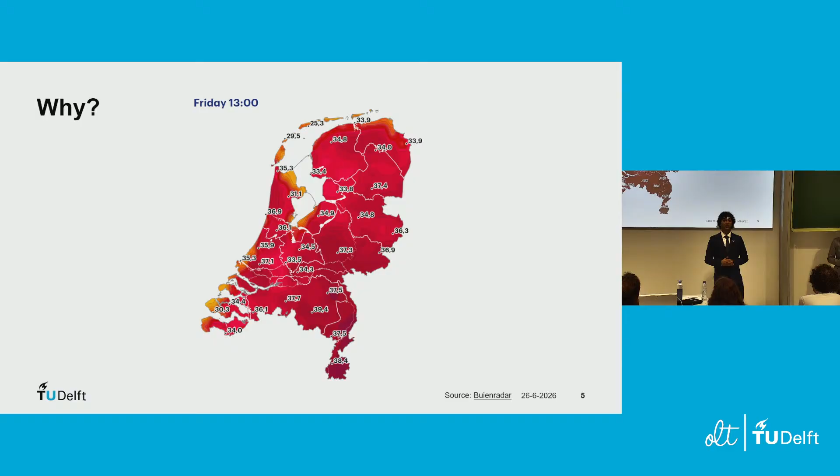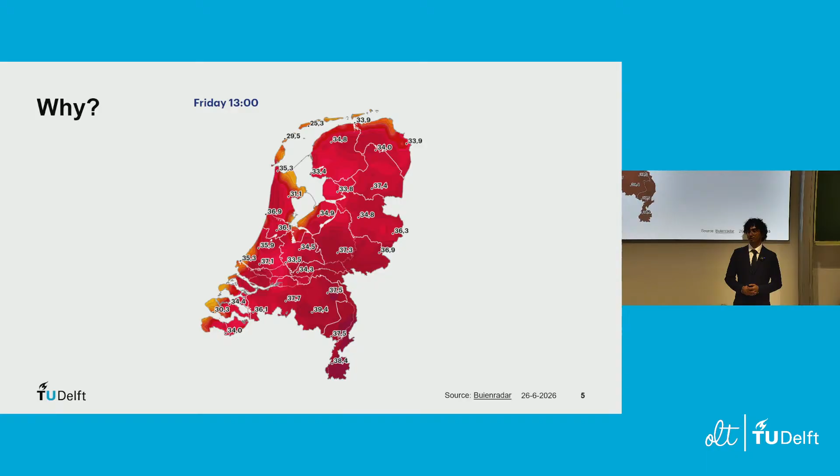It is a result of continued negligence of humanity to treat climate change with the respect and urgency that it deserves. Something has to change, and commercial aviation is one of the biggest contributors to this problem. Per passenger kilometer, commercial flights create more CO2 than any other modern mode of transport, and 20% greater than the next most polluting method. In 2025 and 2026, this has been okay.

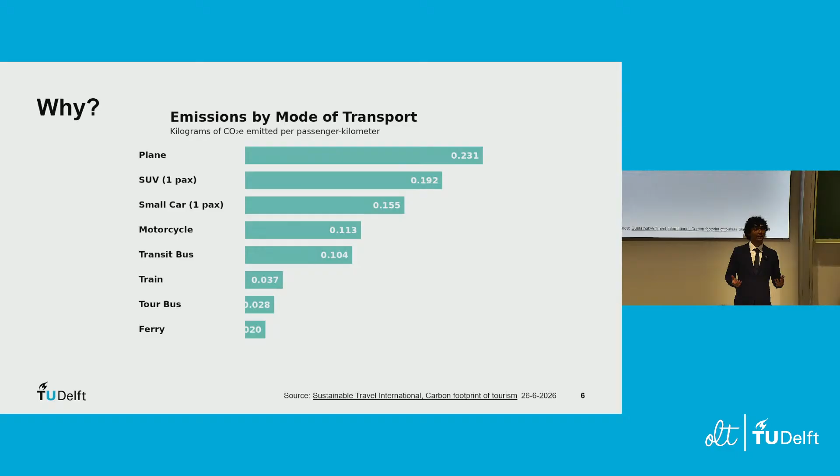However, leading up to 2050, if nothing is done to prevent it, this could become a much larger problem. Why, you may ask? Well, that is because by 2050, worldwide aviation is expected to double. More passengers, more flights, and more emissions.

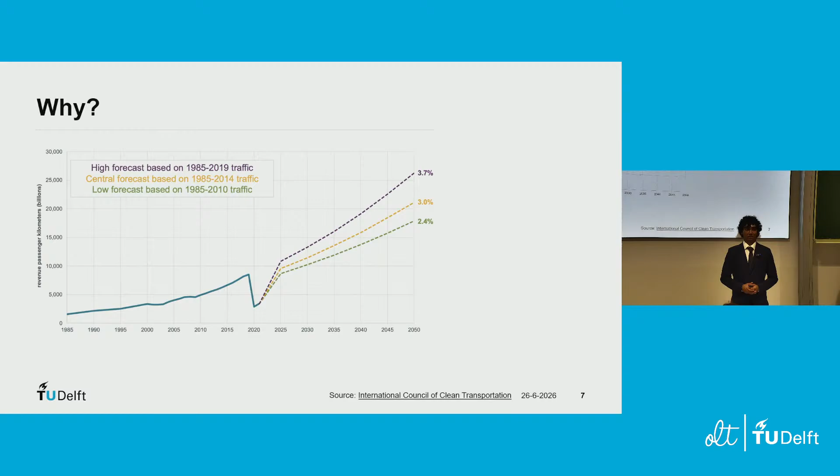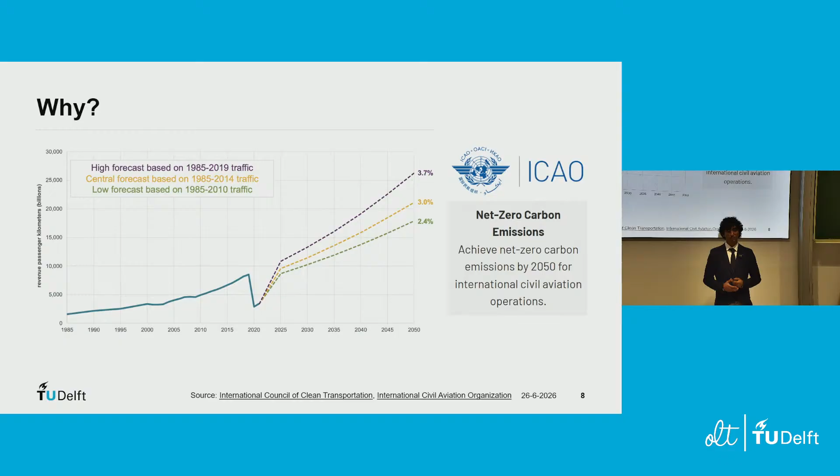In addition to this, the ICAO, International Civil Aviation Organization, plans to reduce emissions of aviation operations to net zero by 2050. The titans of the industry, Boeing and Airbus, have done little to prevent this, and as sustainability and emissions requirements become more stringent, they will inevitably fall behind. And this is where we come in.

The Everwing has focused on the narrow-body market for commercial aircraft. There are two main reasons for this. The first is that the narrow-body market is by far the largest of all commercial aviation. From all of Airbus's wide-body programs throughout history, they have combined to a total of approximately 3,800 orders, while the A320 family alone has combined to a total of almost 20,000.

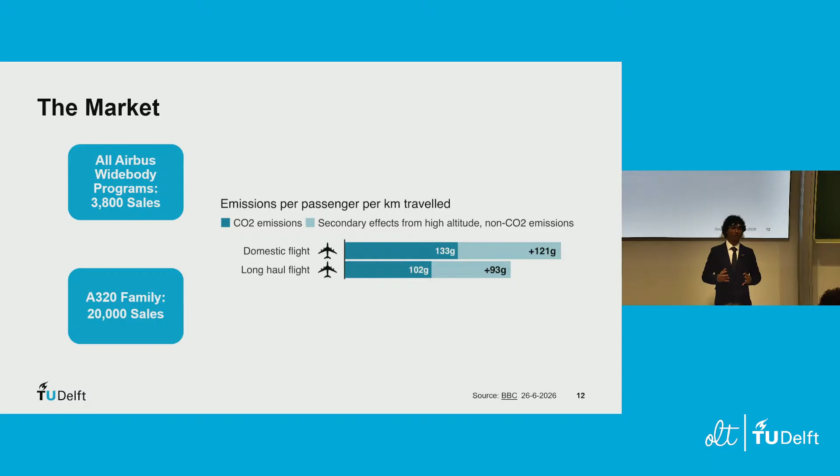The second major reason is that short-haul flights and domestic flights create substantially more emissions than long-haul flights do, and narrow-body airliners fly short.

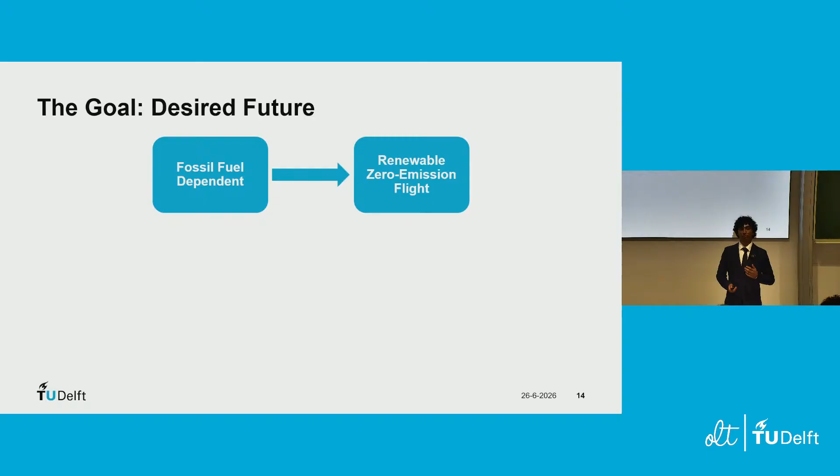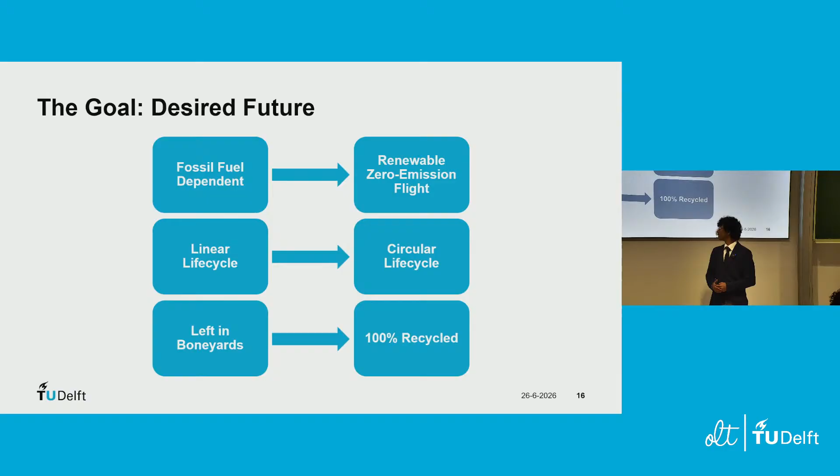In this market, we see a future in which we can go from a fossil fuel-dependent aviation industry to one in which flight is renewable, sustainable, and zero emissions. We see a future in which aircraft no longer follow a linear life cycle, but are rather used for the next generation. And we see a future in which aircraft go from being left in boneyards to being built 100% recyclable. In order to achieve this desired future, we have extrapolated three main goals driving the design of the Everwing.

The first is net zero in service emissions. The second is full end-of-life recyclability. And the third is minimized environmental impact over its lifetime. We have done this all while providing superior performance to the A320 and Boeing 737.

Let's look at some stats. This is the life cycle CO2 equivalent emissions of the A320neo projected to 2050. And this is the Everwing, almost 10 times lower.

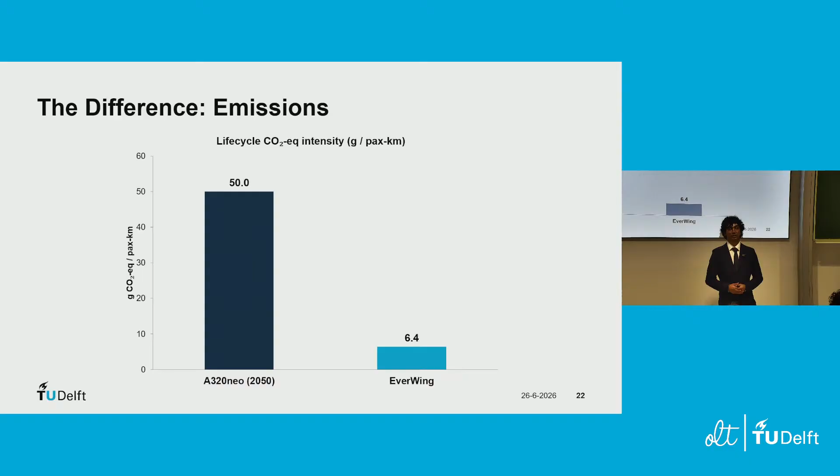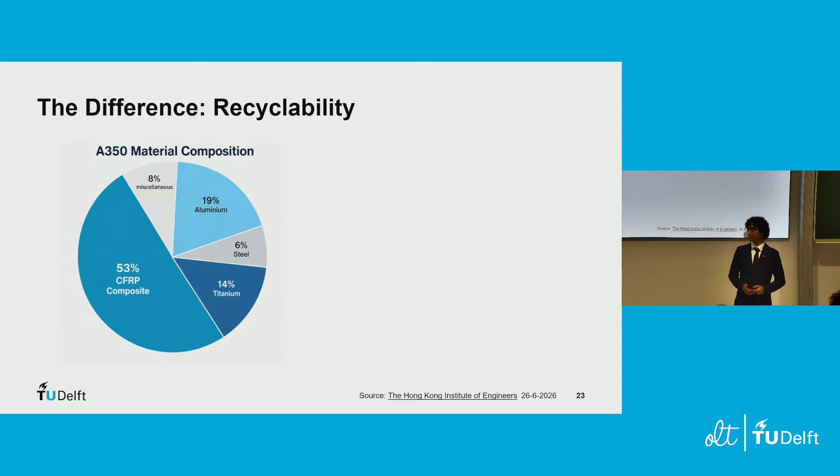In terms of recyclability, this is the A350, one of the newest aircraft on the market. It is composed of 53% CFRP composites, which is a wholly unrecyclable material. If recycled, it loses up to 30% of its structural performance and releases large amounts of fine particle emissions. This is the Everwing. It is composed completely of fully recyclable materials, with each allowing at least 80% of recoverable mass.

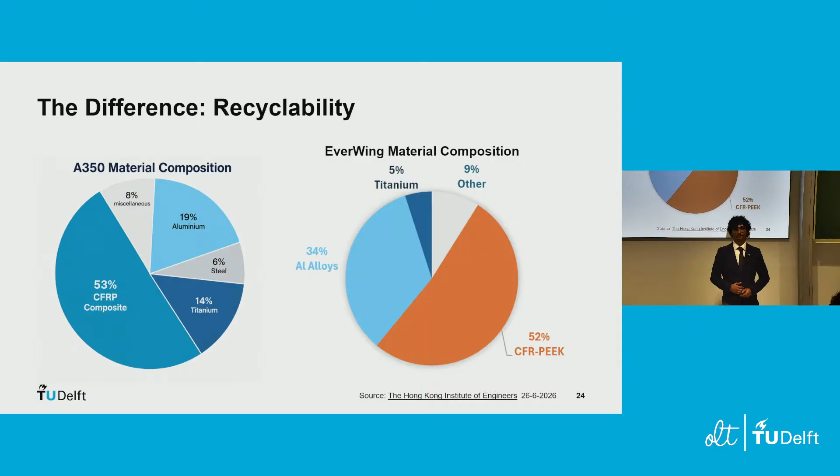This allows the Everwing to break the traditional cycle of cradle to grave and make its way back from grave to cradle. In addition to these three main goals, there were a couple of other driving design requirements for our aircraft. The first of which is a cruise speed of Mach 0.8. Of course, passengers would like to reach their destination in a similar time to if they flew in an A320.

The second is a capacity of 150 passengers, which is on par with its competitors. And finally, our aircraft also had an 80,000 kilogram maximum takeoff weight limit with a 4,000 kilometer range.

Next, let's look at some of the major design choices made for the Everwing. The first is flying fully off of liquid hydrogen fuel cell propulsion.

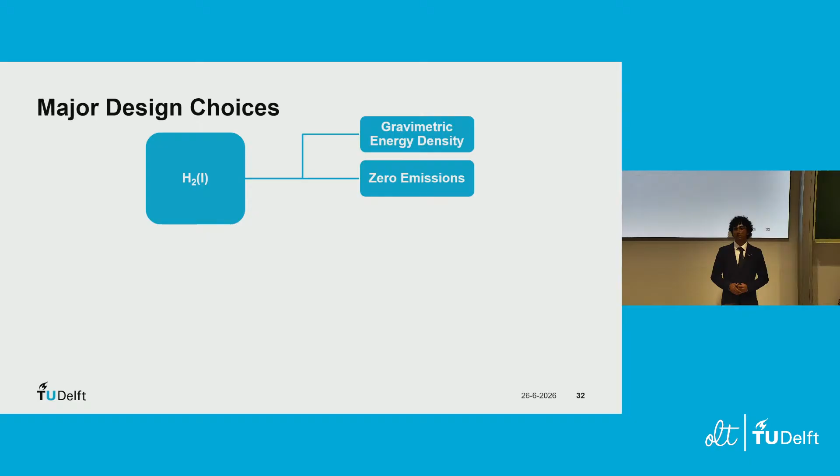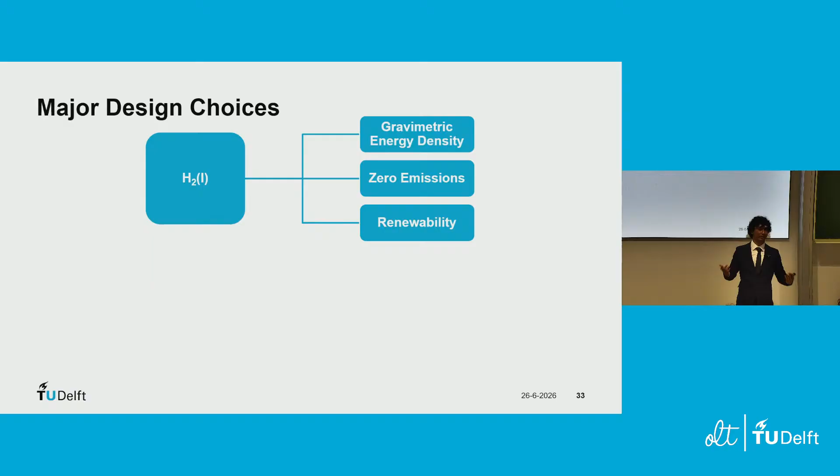There are a couple of major benefits to this. The first being extremely high gravimetric energy density. Per kilogram, it produces more than 3 times more energy than standard aviation kerosene. In addition, it is zero emissions, producing zero CO2 and NOx emissions throughout operations. This is vital to ensuring that the Everwing stays net zero. And finally, it is extremely renewable, after all, hydrogen is the most abundant resource in the universe.

The other main thing we designed our aircraft around is the blended wing body planform. This allows for superior aerodynamic performance compared to a conventional planform, minimizing drag and leading to our second major benefit: fuel efficiency.

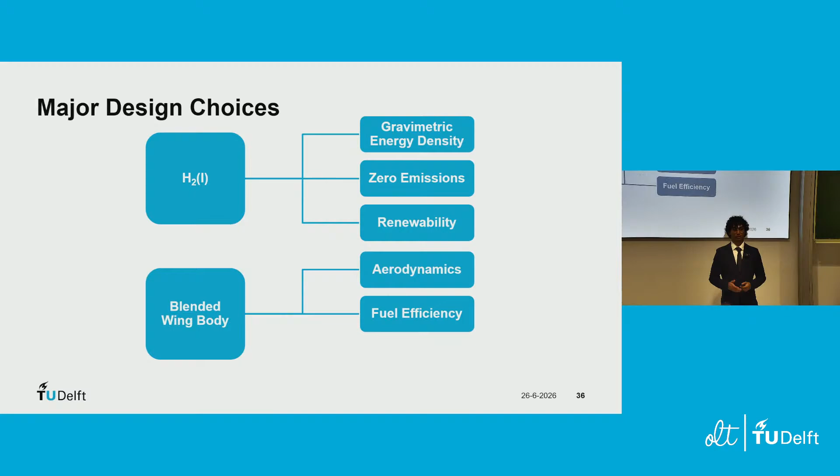Using a blended wing body planform, we have up to 30% reduced fuel consumption, which not only lets us save on volumetric and weight space in our aircraft, but also allows us to source less fuel over its lifetime, reducing its footprint. And finally, the blended wing body offers a large amount of volumetric space.

This is crucial for flying on liquid hydrogen, as while its gravimetric energy density is very high, its volumetric energy density is lower than that of standard kerosene. With a blended wing body, we are able to store as much hydrogen as we need without worrying about space constraints.

Next, to talk about some of the more detailed design concepts is my colleague Bart.

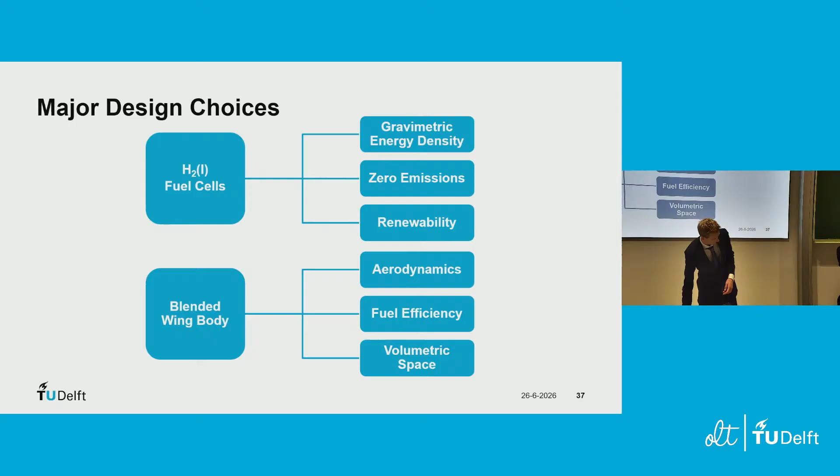Following the past 10 weeks, we have designed an aircraft. It looks as follows, the Everwing. If we look a bit into the details, some main takeaways are the body itself. It has a large body which produces part of the aircraft's lift, whereas for normal commercial aircraft, most of the lift generated by the fuselage can be neglected. Also, we use tails for stability and 4 engines powered by hydrogen fuel cells.

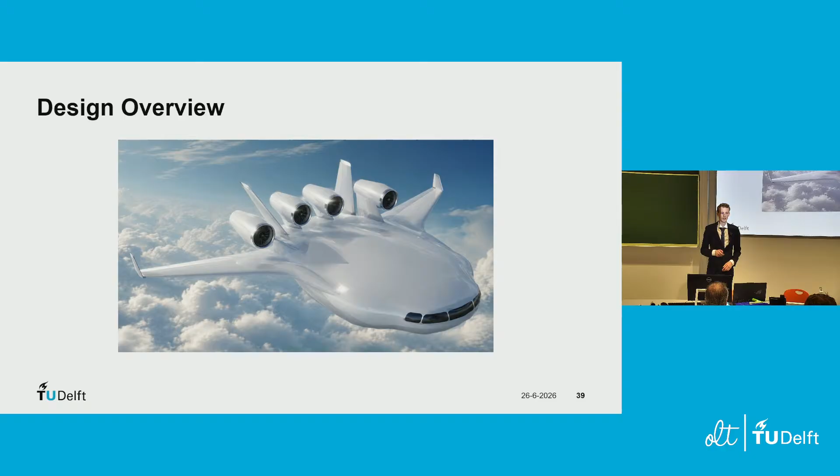If we zoom in a bit more on the cabin itself, we have to accommodate 150 passengers. This has been done by generating a seating arrangement of 3-4-4-3, with only the first row being a bit different, where we have 1-4-4-1. Some big differences can be seen with respect to commercial aircraft, where for example the A320 only has a 3-3 configuration. Our cabin is much wider, but a bit smaller in length.

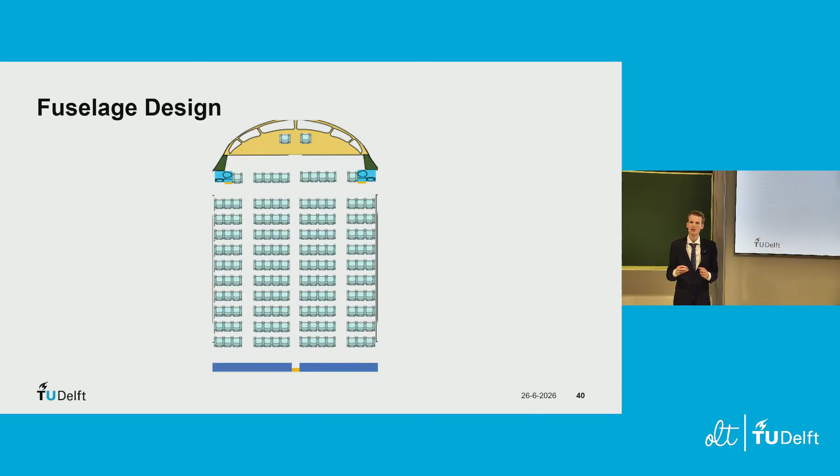To store hydrogen that we use to power the fuel cells, we need circular pressure vessels. There's not a lot of space to store it in the wing, so we store these tanks in the fuselage of the aircraft. 2 tanks will be located next to the passengers, separated by a wall, and one tank will be in the back of the aircraft. This all results in a total fuselage length of 21.4 meters and a width at the widest point of 12.2 meters.

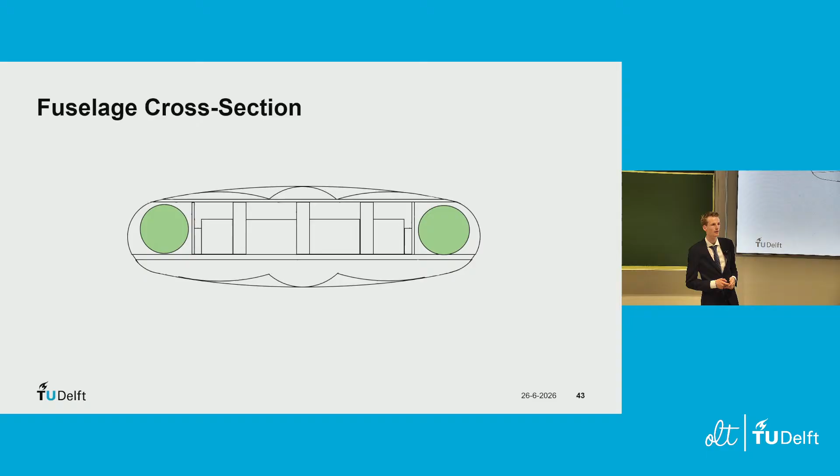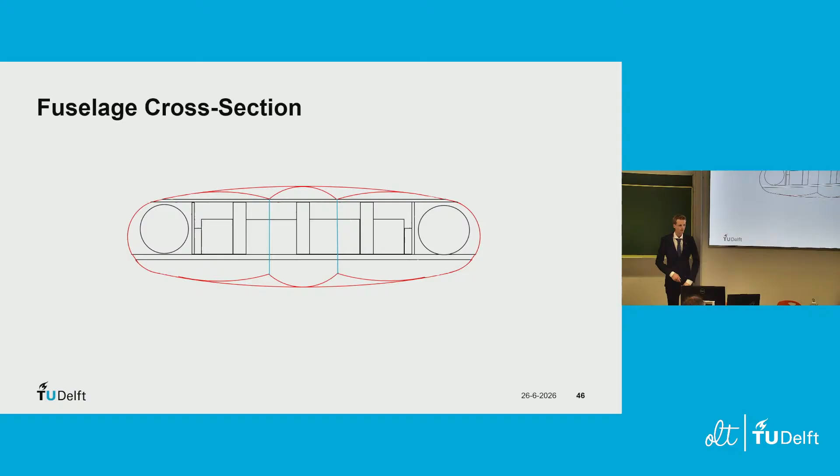To be able to fly at our cruise altitude, set at 40,000 feet, we need to pressurize the cabin to create a nice environment for passengers. This has been done by creating a 3-bubble structure, with one bubble going around the fuselage, one bubble in the middle, and another bubble on the other side, with a skin added in the middle to reduce wetted area where the bubbles are located. There are also blue struts, which help reinforce the bubble structure.

In terms of propulsion, we use hydrogen fuel cell powered engines. The fuel cells will be stored in the core of the engine itself, where gaseous hydrogen will power the fuel cells, and with that generated electricity, a fan in the engine will be spun. Heat generated by the fuel cells will be moved away from the engine by heat exchangers, located in the flow of the engine itself.

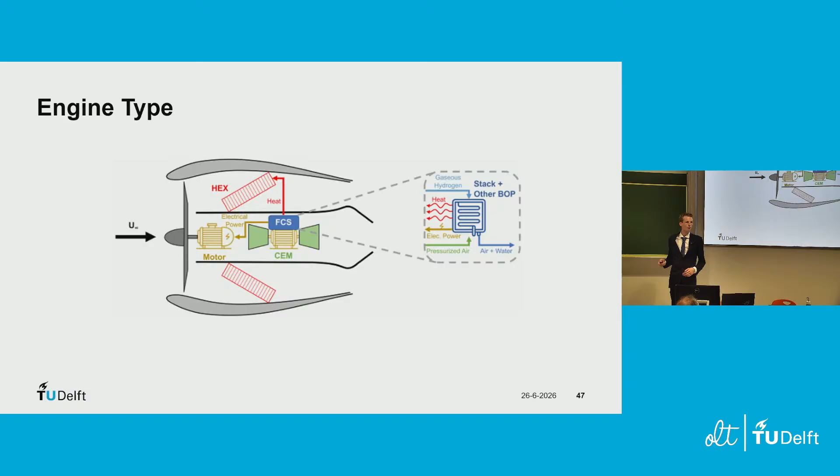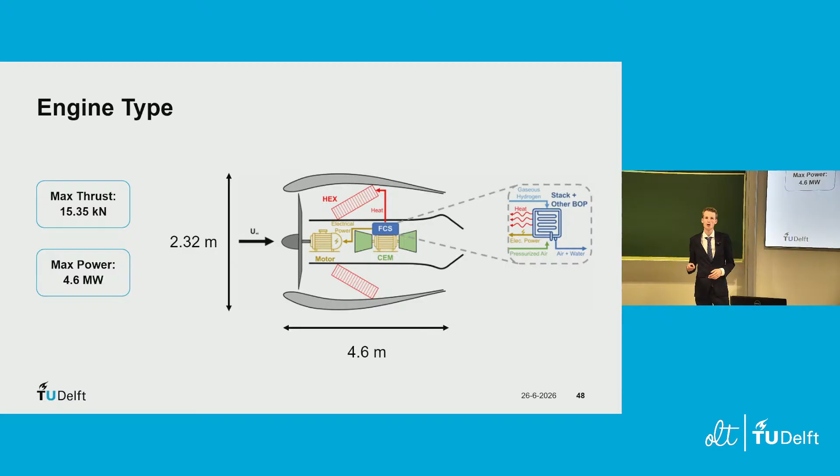If we look more into the performance of the engine, it can achieve a thrust of around maximum 15 kilonewtons and a maximum power of 4.6 megawatts per engine. This is quite a high number, but with current technological developments, it can be assumed these technologies will reach technology readiness level 9 near the year 2050.

These engines will be located on the back of the aircraft, where 2 engines will fit between the tails, and the other engines will be outside of the fuselage, connected by struts.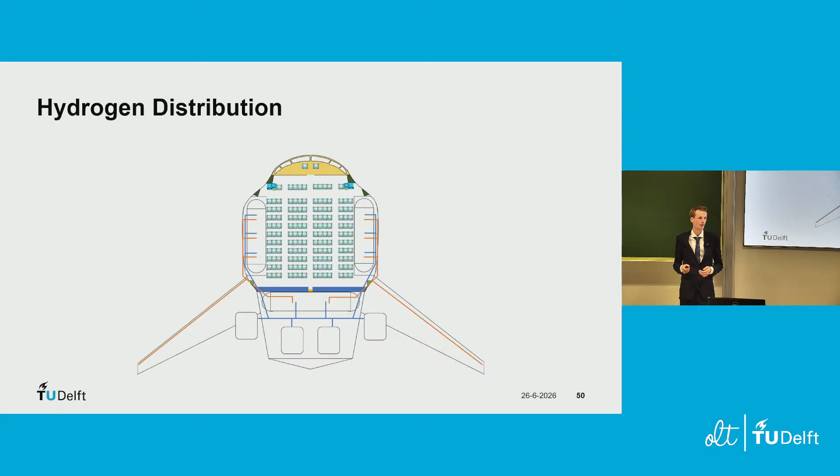Since the fuselage also provides some lift to the aircraft, we need smaller wings. The way we size these wings is by looking at what the total surface area of the aircraft should be. From this, we subtracted the fuselage area, and therefore came up with the area we need for the wing. Performing general sizing methodologies, we came up with the following wing design, where one wing has a span of 11.14 meters.

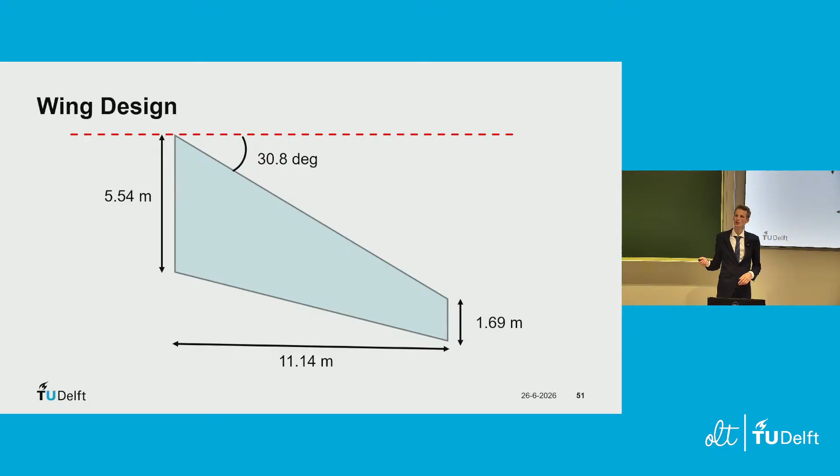Since we want to fly at a cruise speed of Mach 0.8, this wing has been sized with a supercritical airfoil. Therefore, when we fly at these higher cruise speeds, we don't get any Mach waves forming on the wings, and therefore we don't get any increased drag.

If we add these wings to the fuselage, we see that the final span of the aircraft becomes 35.5 meters. As can be seen in green, we nicely stay within ICAO airport reference code C, which also fits the A320 and the Boeing 737, and therefore we stay compatible with these kinds of aircraft.

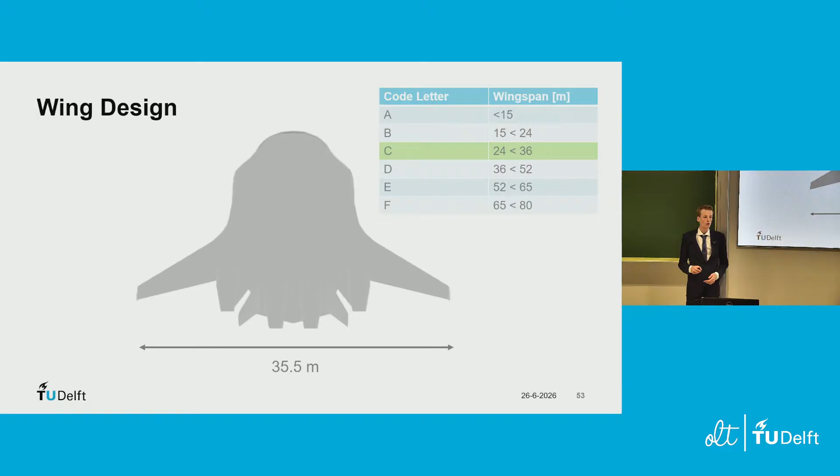The longitudinal position of the wing has been determined by looking at the longitudinal stability of the entire aircraft. This determined the location the wing needed to be from the nose of the aircraft. Only then did we need to space the wing vertically.

In the middle, by the red block, there is an emergency exit. Therefore, it was not possible to fit the wing in the middle of the fuselage. Putting the wing below the emergency exit would cause structural members to fall outside of the fuselage and would make it harder to structurally integrate the wing. Therefore, the wing has been moved up above the emergency exit, and it nicely fits within the airplane structure and can easily be integrated.

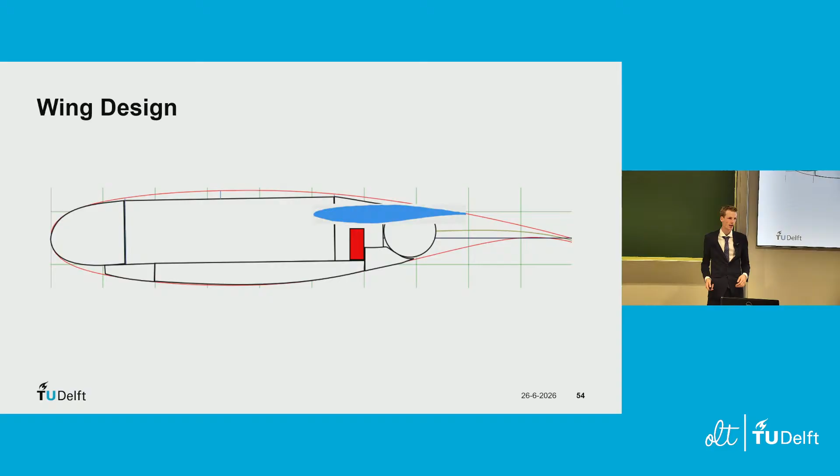For its stability, the aircraft uses two V-tails, where the tail is inclined with a dihedral angle of 70 degrees. The tail has a ruddervator to provide yaw and pitch control. During takeoff, this pitch control is sadly not enough, therefore extra elevators have been added to the wings of the aircraft, and roll will be performed by ailerons near the tips of the wings.

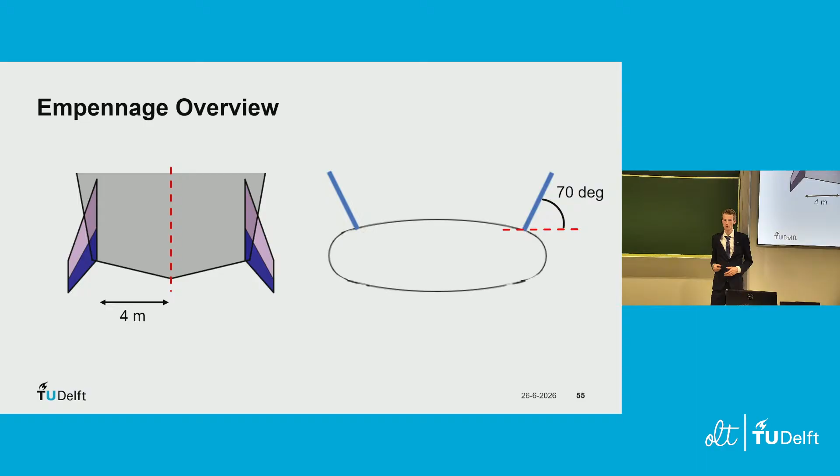If we look from the side of the aircraft, the tail has been fitted on the back. In orange, there's an extra structural member added, which makes sure that we can keep the wing in an upright position and ensures the rudder does not get into the boundary layer created by the fuselage.

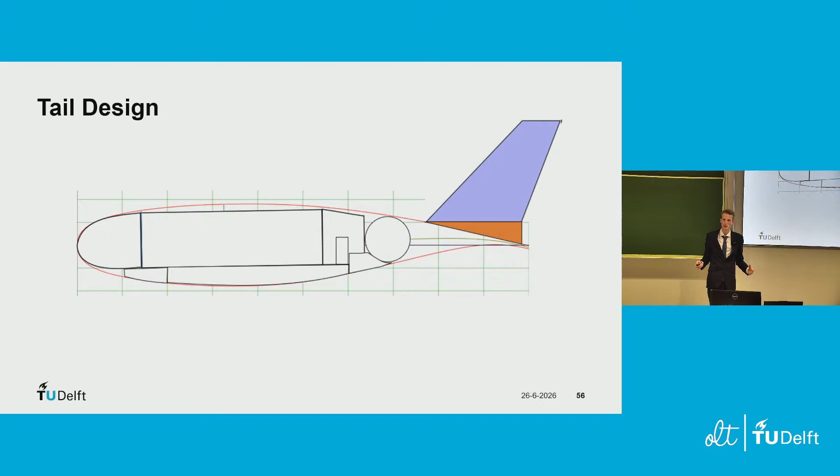Well, now we know about the design itself. What does this mean for the total aircraft mass? The operating empty weight of the aircraft is 41.5 tons. It's able to store 16 tons worth of payload, only needing 3.8 tons of hydrogen to fly to its cruise destination. This altogether results in a maximum takeoff weight of the aircraft of 61 tons.

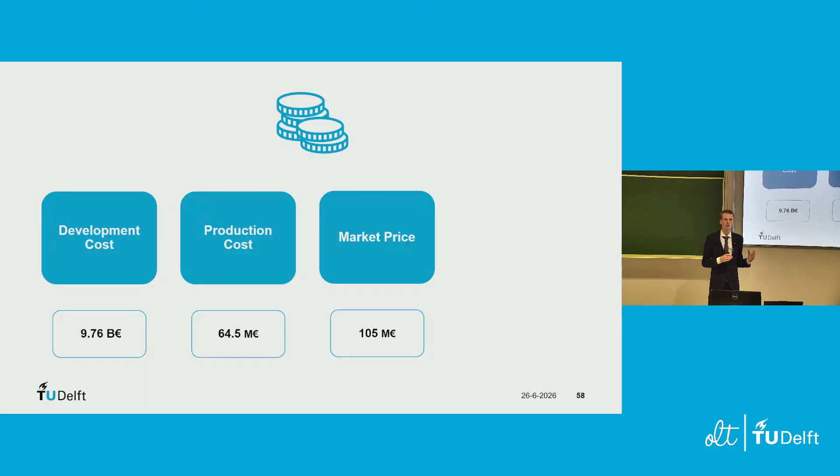In terms of costs, developing the entire system, the entire aircraft, costs 9.76 billion euros. To produce one aircraft on its own is 64.5 million, and the market price of the aircraft will therefore be 105 million euros. This results in a total return on investment of 40.3%.

Now that we know a bit more on how the aircraft looks, I would like to invite Rowan to talk a bit more about the recyclability of our aircraft and its life cycle.

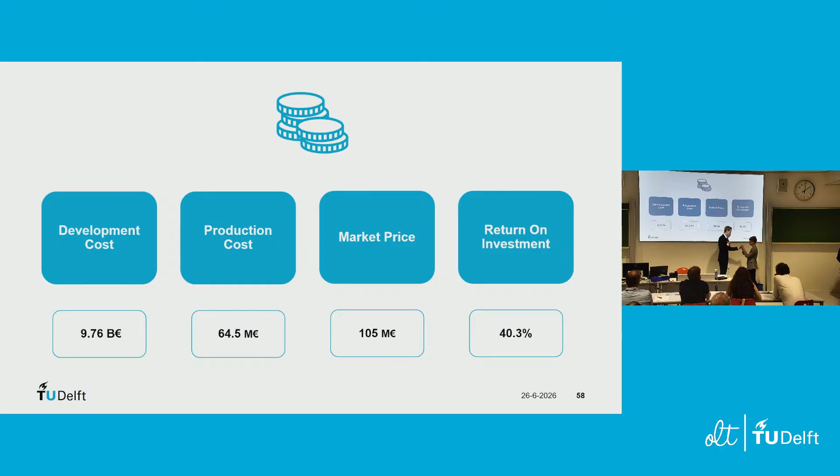Thank you, Bart. I will now take you through the remanufacturability of the aircraft and its life cycle emissions, starting with the material life cycle.

The aircraft is mainly made out of three materials: CFR PEEK, which is a carbon fiber reinforced thermoplast, aluminium lithium alloys, and in some small amounts titanium.

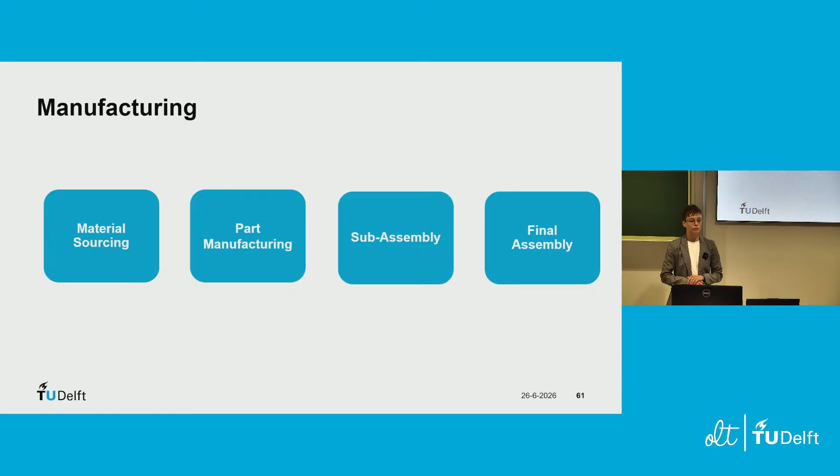So for manufacturing of the aircraft, steps are quite straightforward. You do the material sourcing. After that, the parts are manufactured and assembled into all sub-assemblies. All these sub-assemblies are combined into the final assembly, which is the fully operational aircraft.

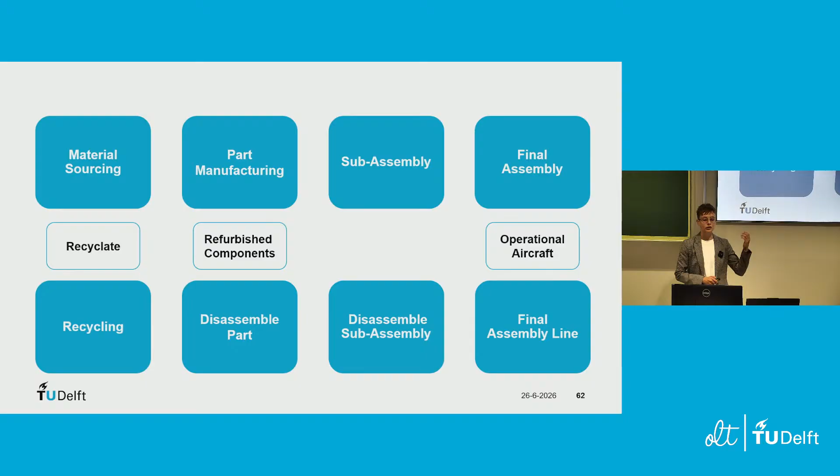After its full operational life, we have to disassemble it. So you return it to the final assembly line, disassemble all sub-assemblies, disassemble all parts, which can either be refurbished and put back into the part manufacturing, or can be recycled, after which the recyclate will be put back into the material stream. So let's look at two examples.

For this, we have the wing spar, which is made out of aluminium lithium alloys, and the skin panel, which is made out of CFR PEEK.

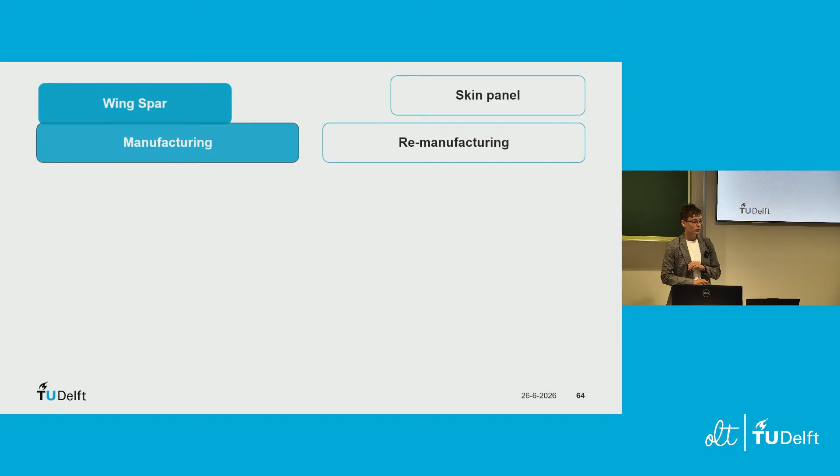So for the wing spar at the manufacturing, again, steps are quite straightforward. You source the aluminium, you manufacture the spar, you assemble the wing system, and then you enter operation with a fully functional wing.

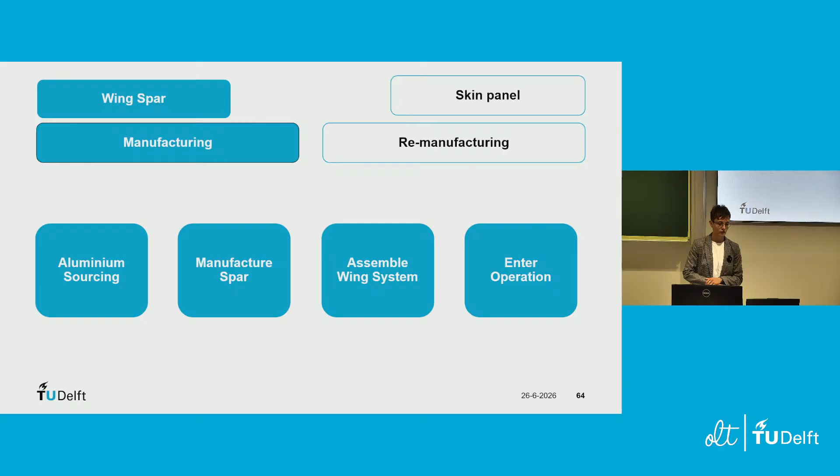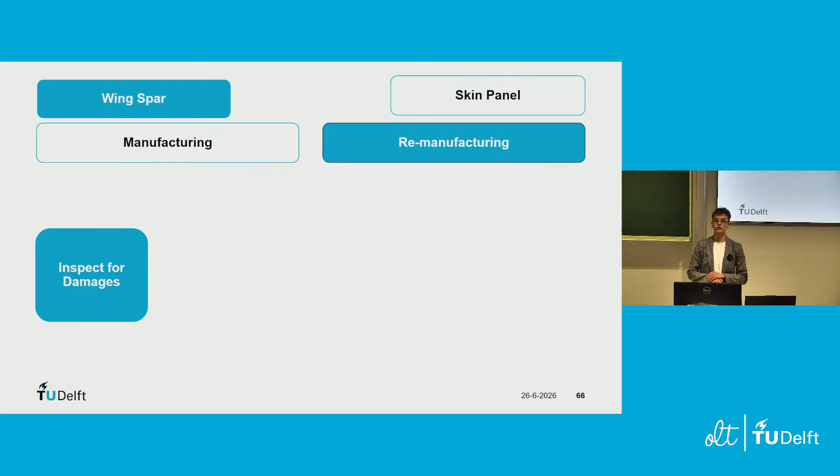After its lifetime, it returns from operation, disassembles the wing system, extract the spar, and then you inspect it for damages. After inspecting it for damages, you have two options. One, you refurbish the component, and it's a new component which can be used on a new aircraft, or you melt the component down, and then you have new materials which can be put into the material stream.

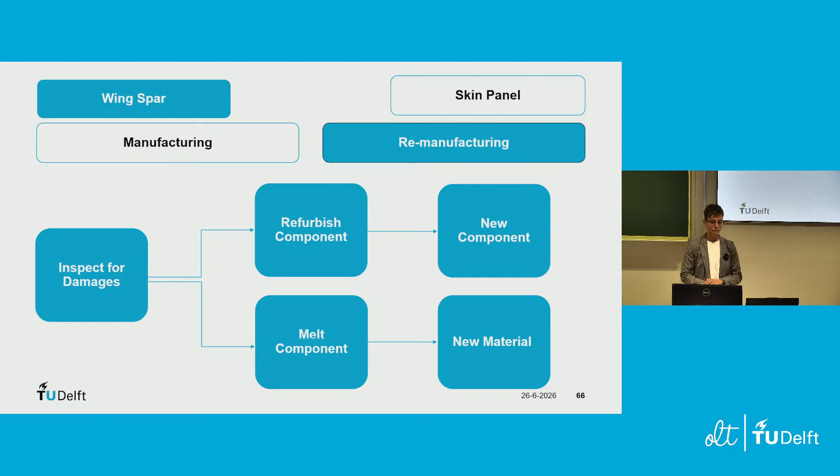For the skin panel, this looks roughly the same. You start with the material sourcing, you manufacture the panel, you assemble it into the fuselage, and you enter it into operation.

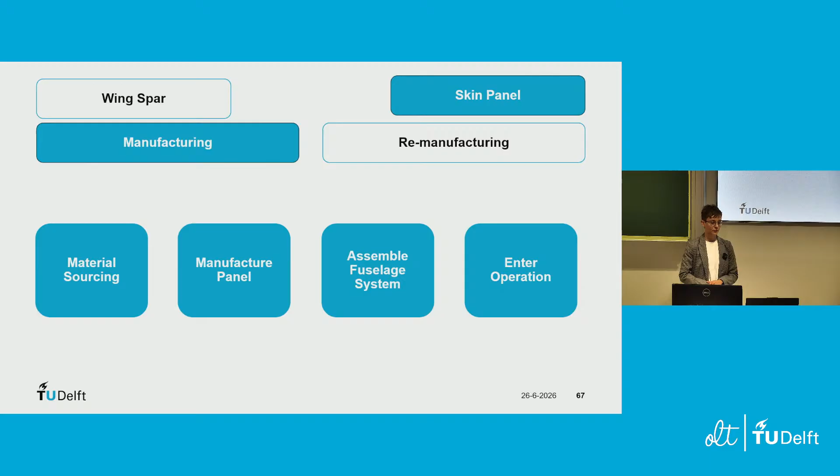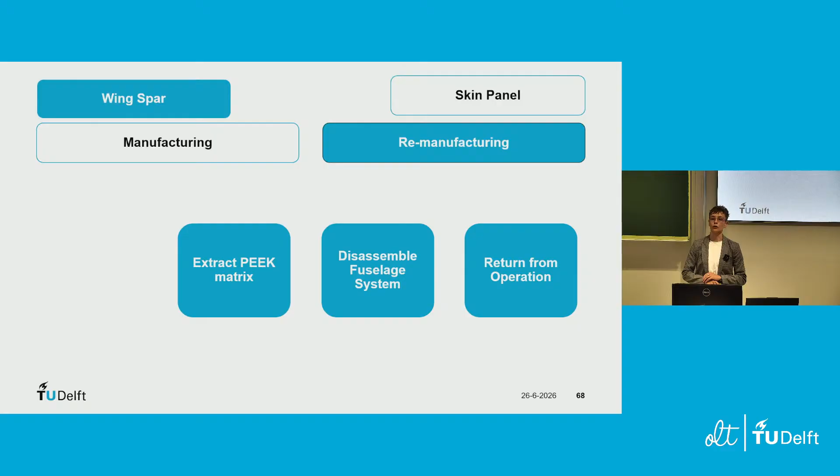After operation, it's a little bit different. You return it from operation, you disassemble it, and then the main difference happens is you extract the PEEK matrix, which is the plastic that holds the carbon fibers together. You inspect these carbon fibers for damages, and after this, you can refurbish the fibers, and they can be used as a new material in the material stream.

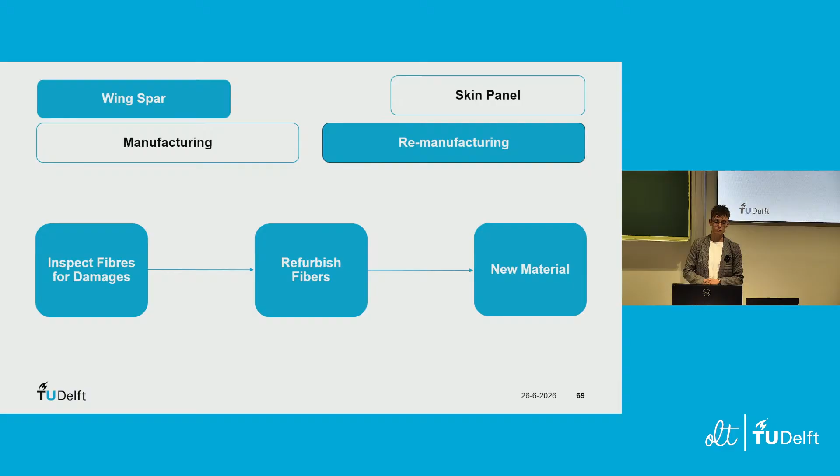Next up is the life cycle assessment. For this, we assess the climate change potential of our aircraft throughout all of its life phases. So from raw material extraction to the manufacturing and assembly, also throughout operations, including the liquid hydrogen sourcing, the maintenance and repair, and in the end, the end-of-life recycling.

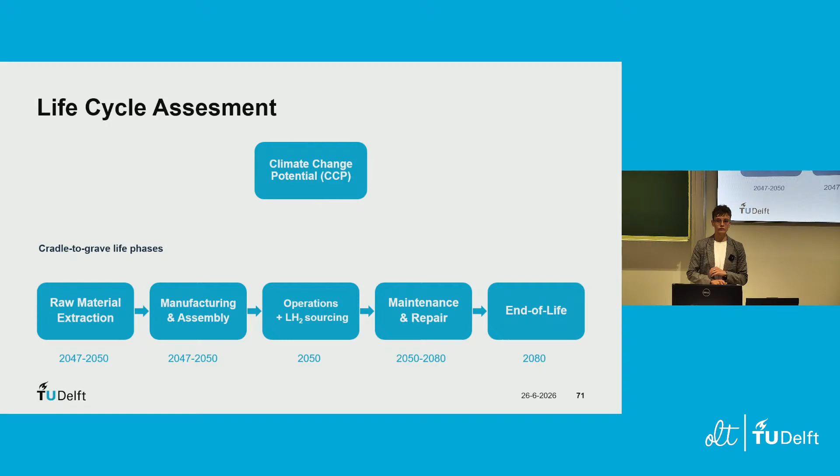So let's first look at the raw material extraction. As introduced before, our aircraft is mainly made out of CFR PEEK and aluminium lithium alloys. Together, we are looking at a rough CCP of 951 tons CO2 equivalent.

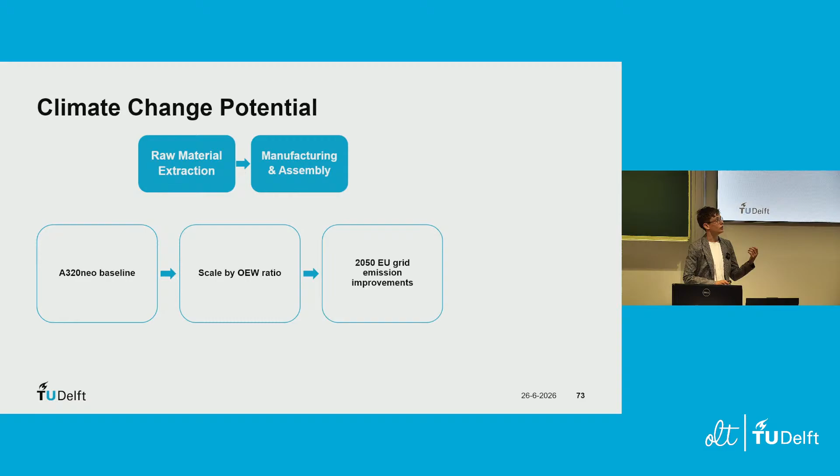Next up is the manufacturing and assembly. For this, we took the A320neo as a baseline, scaled it with our operating empty weight ratio, and took into account the 2050 EU grid emissions improvements. Together, this gave us a manufacturing CCP.

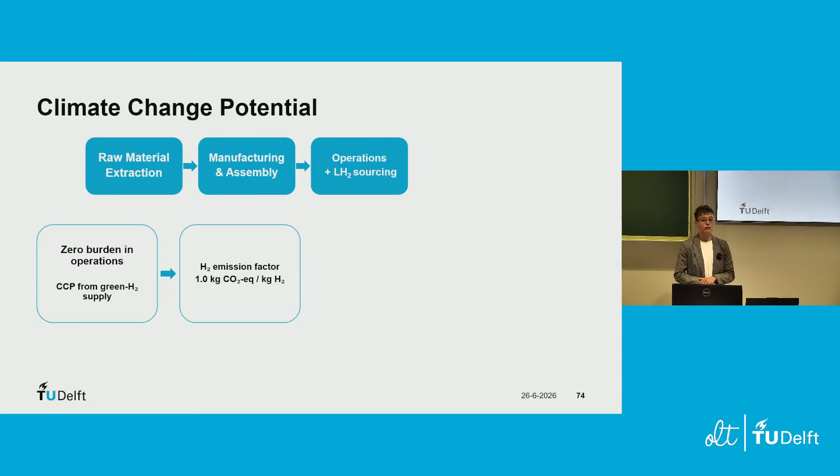So for operations and liquid hydrogen sourcing, we have said our operations are fully net zero, so our main CCP is coming from the green hydrogen sourcing. For this, we took a 1-to-1 emission factor, where 1 kilogram of CO2 equivalent emissions are introduced into the atmosphere for 1 kilogram of hydrogen. Together with the utilization rate of the aircraft, this gives us a liquid hydrogen sourcing CCP.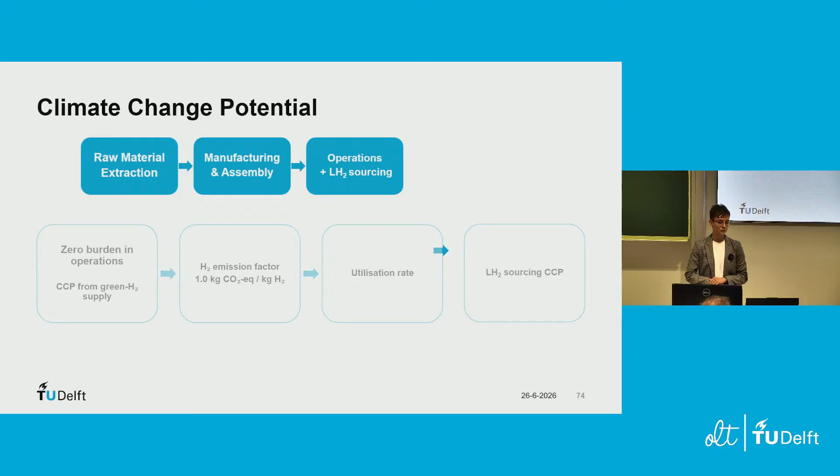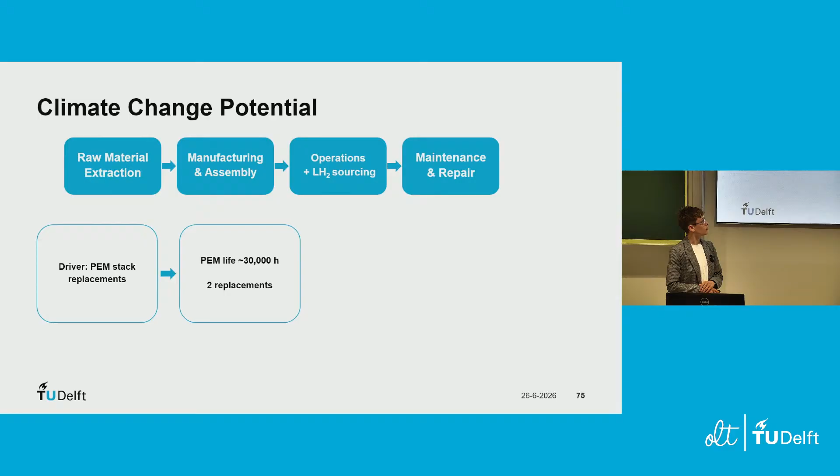For the maintenance and repair, the main driver are the fuel stacks in the fuel cells for the hydrogen engines. We calculated that for our lifetime of 30 years, we need roughly 2 replacements of these, and together with the shaft power of the engine, this gave us a maintenance CCP.

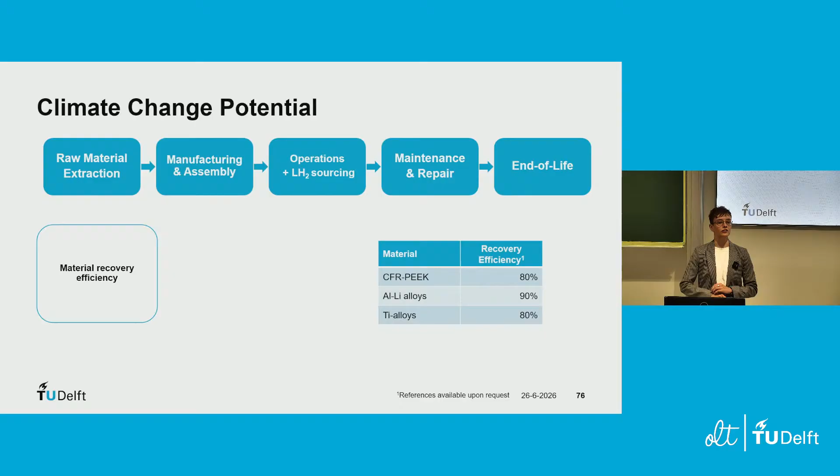Lastly, end of life, which was the goal of this entire project. Main driving factor of this is the material recovery efficiency. For CFR PEEK and titanium alloys, this is about 80%, and for aluminium lithium alloys, this is about 90%. Take that together with the avoided emissions through the remanufacturing process, the energy required for the processing and disassembling, you get a negative net burden throughout this end-of-life phase.

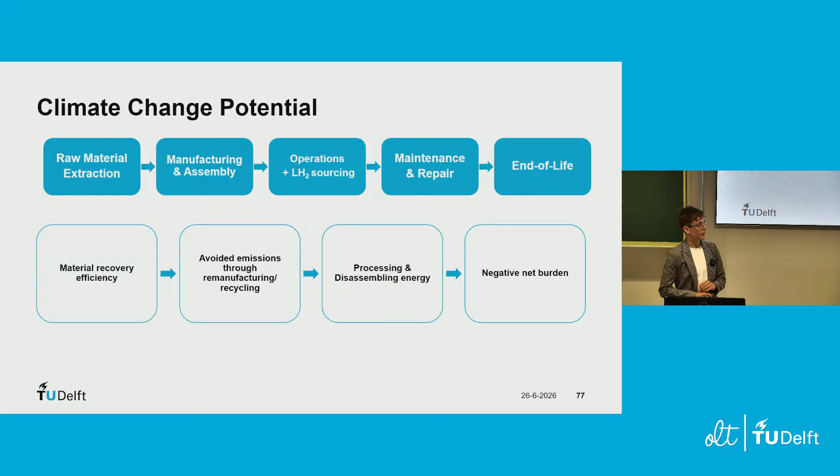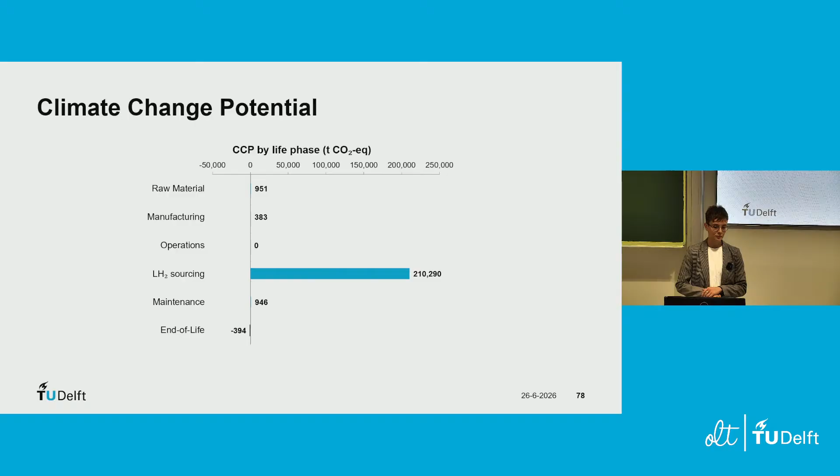So all of these CCPs have been calculated and put into this graph for you. As you can see, the main CCP emissions thing is the liquid hydrogen sourcing. This is also quite sensitive to the way we source the hydrogen, either using green energy or still fossil fuels. Zooming in, we can see the raw material sourcing is the next worst driving factor behind our climate change potential. And I would like to highlight our net zero operations and our positive impact throughout end of life.

With that being said, let's look at our goal. Our mission was to design an aircraft for 150 passengers that is fully recyclable and achieves net zero operational impact. With the Everwing, we have shown that this is possible through the use of recyclable materials and sustainable propulsion technologies. The Everwing is not just a concept. It represents a realistic vision of what future of aviation can look like. And by designing it today, we have taken one step closer to making that future a reality. Thank you so much for joining us.

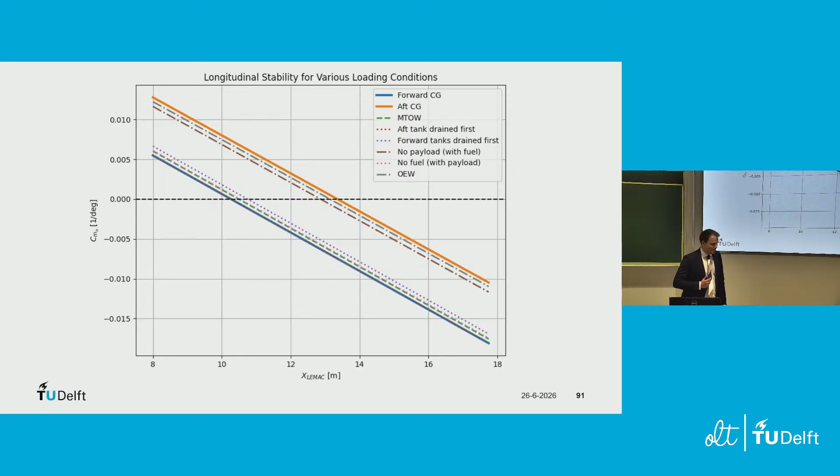Then my last question, then I'll stop. Okay, then, because I'm over.

You know why balloons are round, right?

So if you make a double or triple bubble, we had the issue with the A380. It's an oval, not a circular fuselage, and that gives a lot of difficulties in your structure. If you look at the maintenance program of the 747, where do you have all the cracks? Exactly at the interface between the upper bubble and the main fuselage. How do you want to cope with that? How do we want to deal with stress concentrations from a non-circular fuselage?

I think my colleague Ron would be happy to answer. For the triple bubble fuselage structure, we have considered mainly the amount of bubbles and then the structure behind it. The airframes that are there also support the outside of the bubble, and then the struts are there to make sure that they don't expand too much. Into maintenance, we have not looked that deep into it, but we are aware that this is where the biggest stress concentrations are within the triple bubble fuselage.

Regarding maintenance, I'm willing to say a little bit extra about that. Obviously because the double bubble design is not inherently new, the maintenance thereof is more complicated. That is very true, but these procedures exist, and maintenance, repair, and overhaul organizations, MROs, are trained in these kinds of things. Our maintenance relies mostly on the novelty of the design. For example, the fuel cell stack introduces some extra maintenance difficulties, especially since these are troubles that aren't known with MROs, and therefore a lot of operational effort needs to be introduced for this project to become feasible. We would like to see this project not only as a design we do, but as a communal effort of the entire aviation sector.

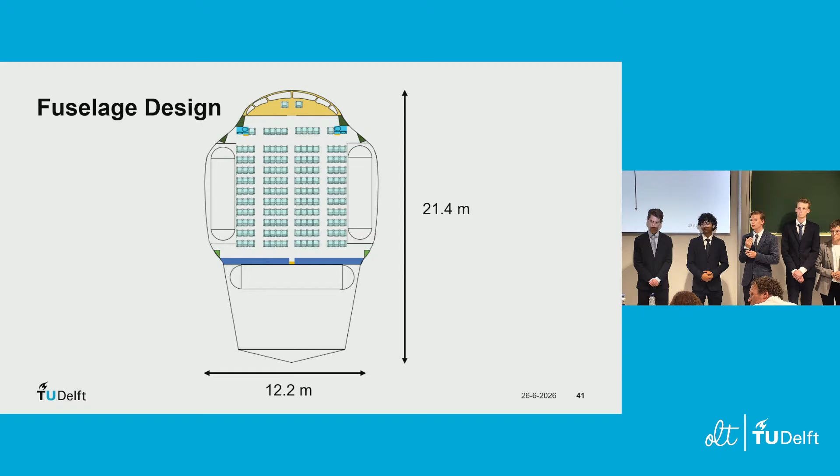So you have roughly 2 times the number of passengers as in an A320, and when we developed the A321 ACF, we had to put a 3rd door in behind the wing because we did not comply with the rules for evacuation. Just to give you context. We have 150 passengers. 150? Yes. Ah, I understand, the number was wrong. Okay, then it fits. Okay.

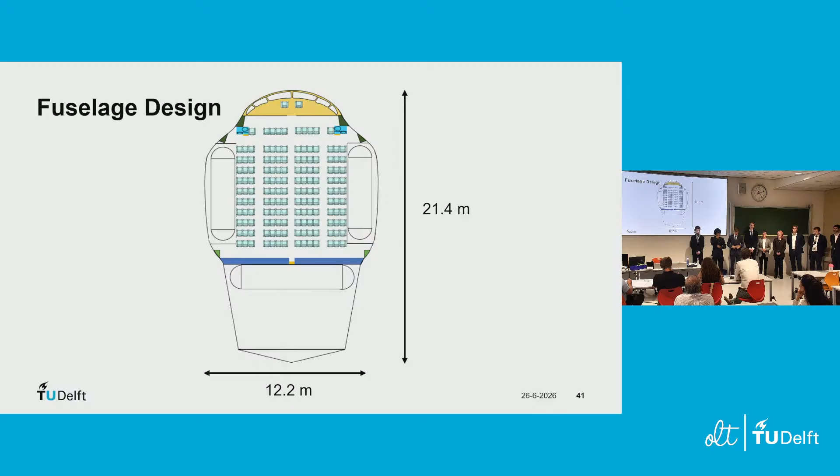Maybe then I have a question on this material that you're using, this PEEK material. I'm not too familiar with that. Some people might be, but how common practice is it already to really reuse it?

So the question was about our material CFR PEEK and about its recyclability. Well, CFR PEEK is currently being researched. It is not yet TRL 9. It is a carbon fiber reinforced composite, but it uses polyether ether ketone as a matrix, and it is much more recyclable than standard CFRP because of the fact that the matrix is a thermoplastic rather than a thermoset.

This allows you to, for example, burn off the matrix and save the fibers without losing a lot of the structural integrity that might have been lost if you were using a standard CFRP. In addition, there are a couple of methods being researched, such as glass fiber delamination, in which you can keep both the matrix and the fibers without losing much of its strength. Another method, for example, is solvolysis, in which the matrix is broken down and is able to be reformed with the fibers taken out.

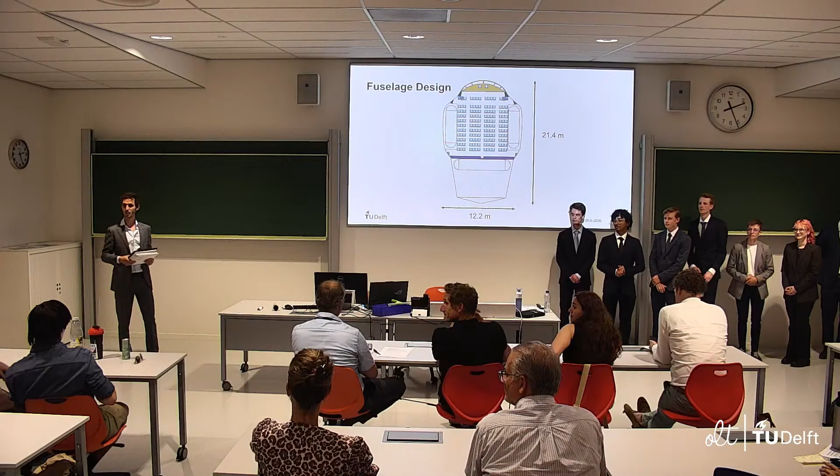I will say a couple of words. What is in the nice folder? Great, yes, okay.

Well, good afternoon, everyone. My name is Julia van Kamp, and I'm the one who dreamed up this weird assignment where I wanted them to build a fully recyclable aircraft. I think they succeeded quite well, but now we're here for something which is actually a bit more joyful even than the whole DSE. It was beautiful to see you work on this project, but now, as already was mentioned, 8 of you are also getting a diploma, and I have the honor to give you your diploma.

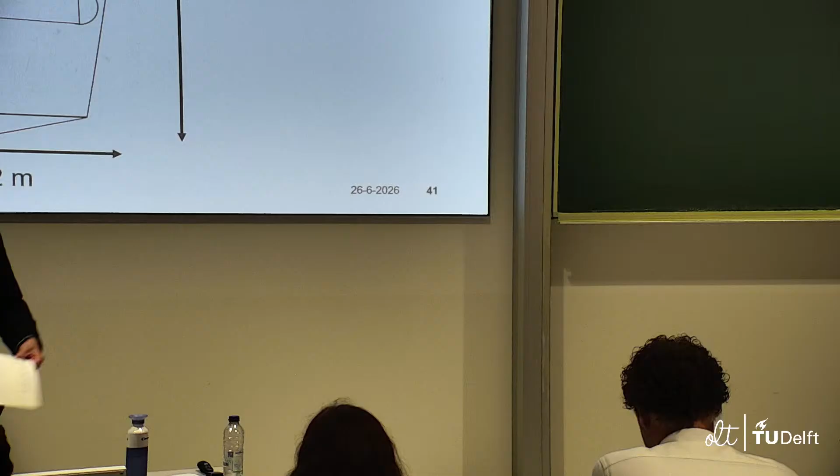And next up is Bense. Congratulations as well. And well deserved, so there you go.

Next one is Martijn. And naturally also a folder for you. And the final, no, not the final one, Jelle. There you go. And Jose.

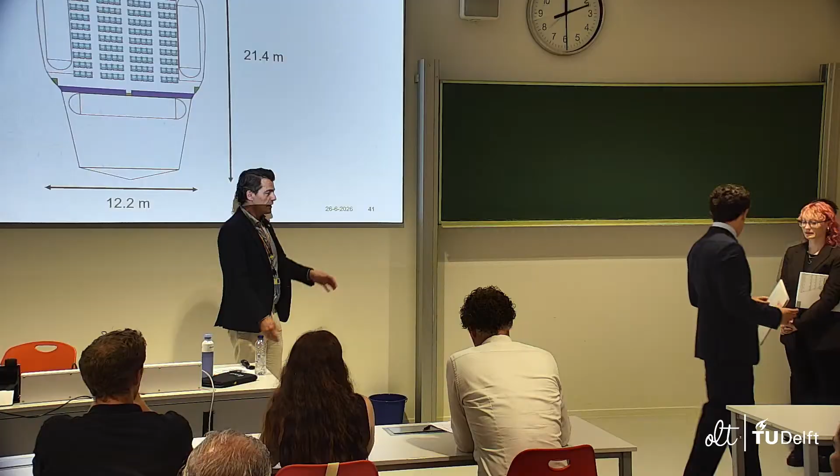What is very nice as well to mention for this group, I don't know how that came to be, but well, actually I think 7 of you are going to do Flight Performance and Propulsion after summer, so the Masters in Flight Performance and Propulsion.

Well, sir, can I make a suggestion? Yes, everybody move, we will move for the picture. Yes, that's a lot better. Thank you very much for directing it. By the way, I also did not introduce my colleague Olaf Snoosma, who was so kind to supervise this group together with also our other coach, Nick Papalamos, but he's not here.

Well, everyone say Everwing, I guess. Yeah, and now let's have fun.

Congratulations, well deserved. Yeah. Congratulations. Congrats.